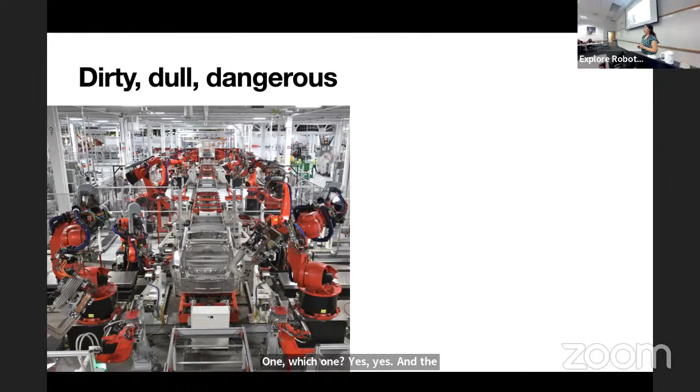That we can actually open it up and see what's happening inside.

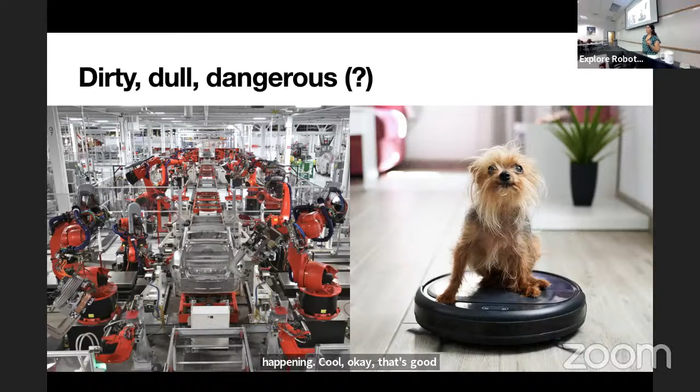Another example, I was watching a show on TV in a hotel room called The Toys That Made America or something like that, and they were showing Transformers. They're coming back, I think, or they already came back. I'm not familiar with what's going on at the moment, but I remember these toys - super metallic, bulky, technological, rigid. That kind of toy is what we were interested in playing with for a while, and this kind of toy has inspired us to do robotics.

What about now? Yes, now it's less about toys and more about science fiction and seeing what we're able to do now, and interested in what we can actually do in the future.

People might be inspired by the Roomba in their house, but it seems comparatively uninteresting. Roomba is less interesting than Transformers. What is more interesting than Transformers? Well, to a kid, yeah.

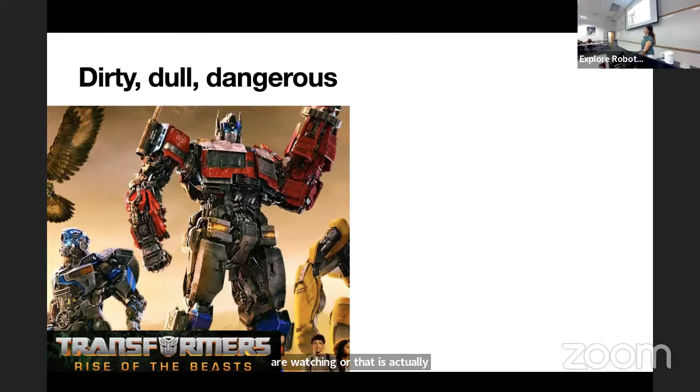Is it cute? Yeah. Do we like it? Yeah. Does a robot have to be cute for us to like it? No? Yes? Okay, nice answer.

So I'm opening this up with a question: what are we doing in robotics at the moment? Are we still interested in these? Or are we now shifting our interest?

Or with developing technologies - material science, controls, learning and everything - are we actually expanding our view of robotics and what a robot can be? Just food for thought, think about it. I'm very happy to talk about these kinds of questions.

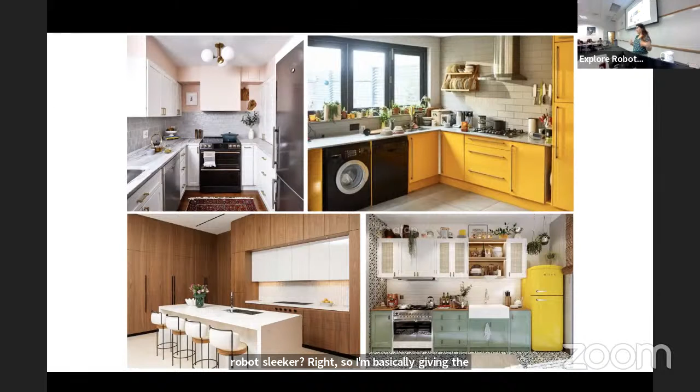Is it possible? That's the idea behind my research. So where do I look at how can I make it? To nature, obviously. We see a lot of examples that animals are compliant, so maybe we can do that. Like cats, I like cats, they can basically fit anything because they're like fluids, right? I look at different animals underwater.

Octopus is a great example. They can stiffen their limbs or relax their limbs, do a bunch of different motions, and they can fit in this glass, this bottle, and also cover a huge space. And ants are my favorites because they can jump, they can smash, they can use their mandibles as manipulators, but in very different environments. Put them on sand, put them on rigid surface, put them on a leaf, it's fine, they can just work it. So how do I make robots that can actually change their shape or adapt their shape to the environment, become bigger, smaller, or change their stiffness, or work on different surfaces? Is it possible?

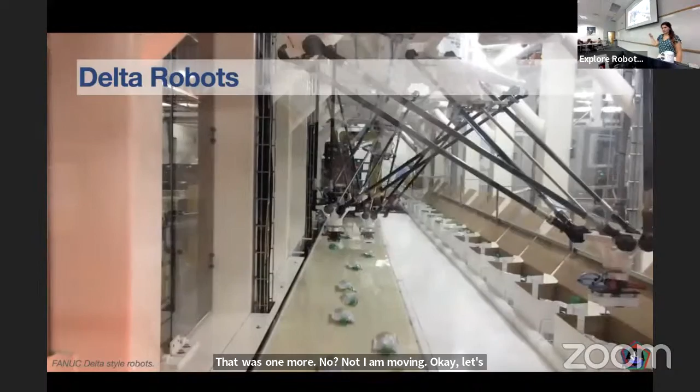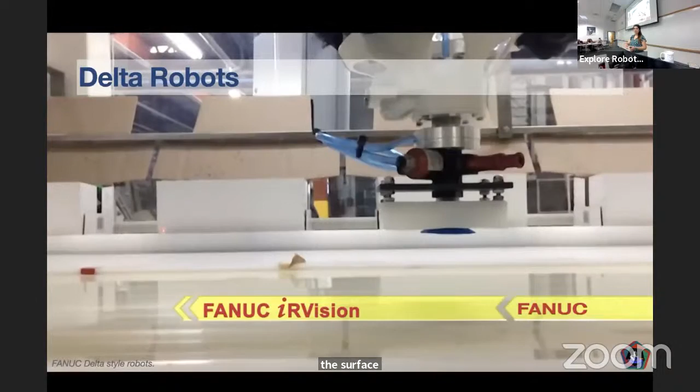Okay, let's start with combined manipulation. So these are Delta robots. Delta robots are widely used in industry. They have 3 actuators, meaning 3 degrees of freedom, but the actuators are connected to the end effector with parallelograms, which makes the end effector parallel at all times to the surface. So they can move in X, Y, and Z, but they cannot do any rotation. If you add one more degree of freedom at the very tip, they can have a 4th degree of freedom, but usually the mechanism is 3 degrees of freedom.

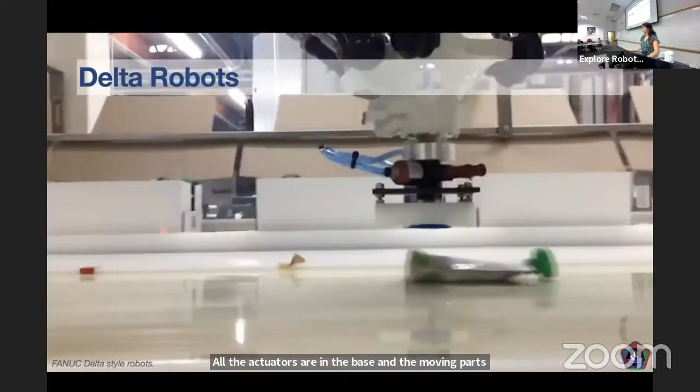They are widely used for pick and place applications where we don't want humans to touch things to be picked and placed, like medicine, food, food packing, medication packing. The good thing about them is that they are super fast, super precise, very accurate, because they don't have any mass in the moving parts. All the actuators are in the base, and the moving parts are just beams, like linkages with joints and links. It's a bit choppy, maybe because of Zoom, but you get the idea. So these are widely used, but they are usually large, rigid systems. If you look at nature, not everything is as rigid as this.

So my first inspiration is: if I can make it smaller, what would happen? If I can make it softer, what can happen?

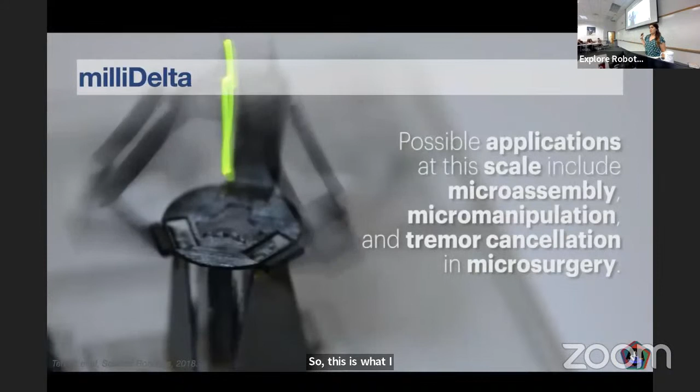This is what I did when I was a postdoc. This is a much smaller version of a Delta robot made using layer manufacturing techniques, not a 3D printer. You basically sandwich rigid and flexible materials to create linkages, and then you put it together, like pop-up cards.

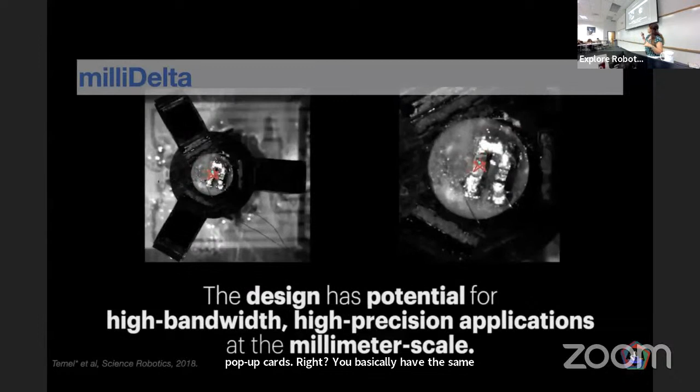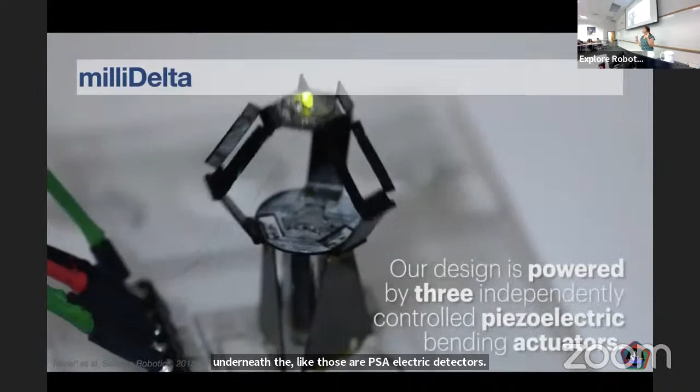We designed these robots. If you notice the triangles underneath, those are piezoelectric actuators. They can bend both ways. The good thing about piezoelectric actuators is they are extremely fast, so with that we reached super high speeds, which was very nice. And it's super small, penny sized. What can we do with it?

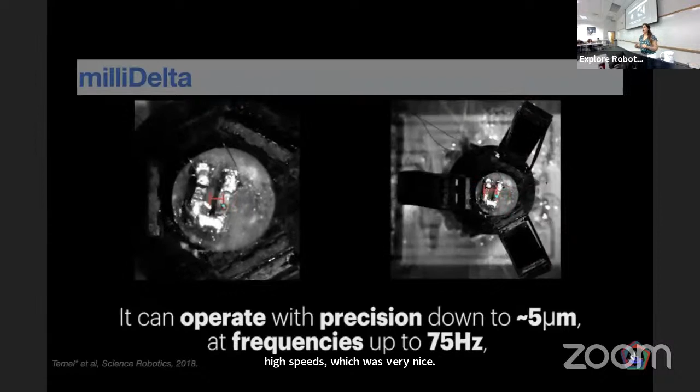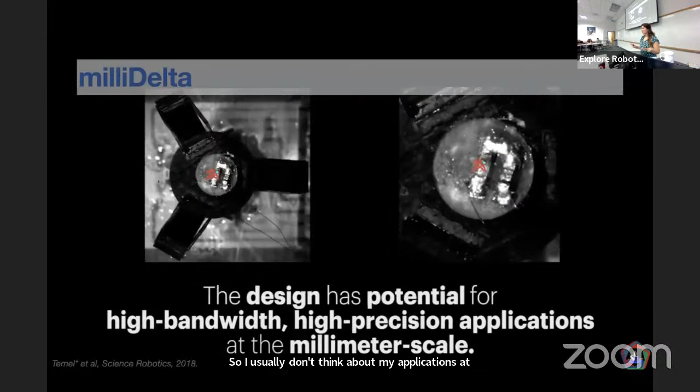So I usually don't think about applications at first. I like to play and then discover, and then I'm like, oh, now I have to find an application for this.

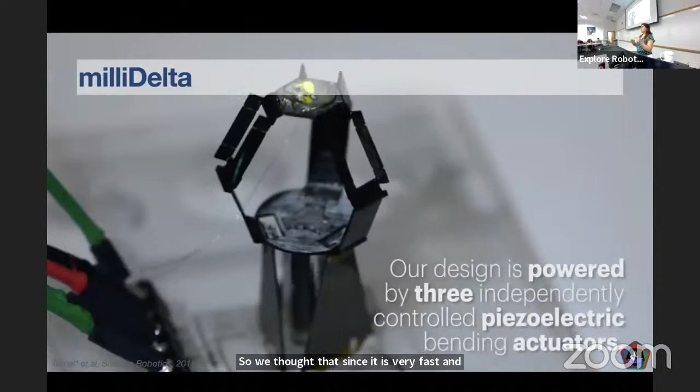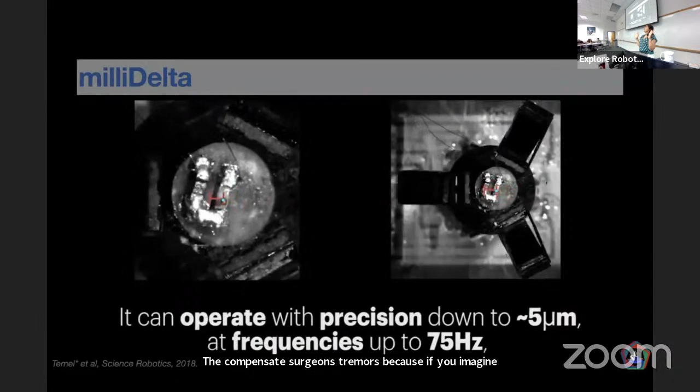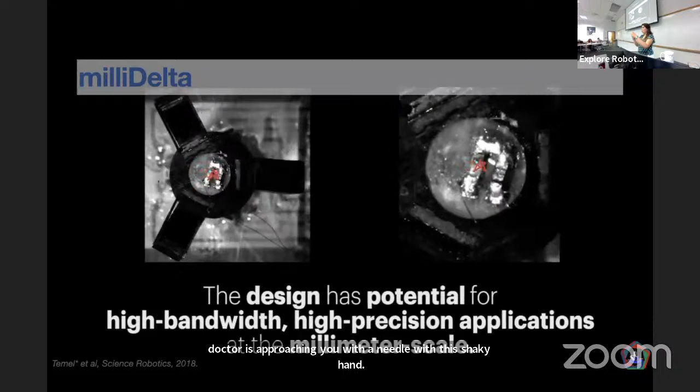We thought that since it is very fast and compact, it might be a great tool to put inside handheld surgical tools to compensate surgeons' tremors. Because if you imagine sitting in an eye doctor's chair, and the doctor approaches with a needle with a shaky hand, I think I would run. You don't really want the needle to shake, right? We showed that this actually compensates different people's hand tremors in a very good way.

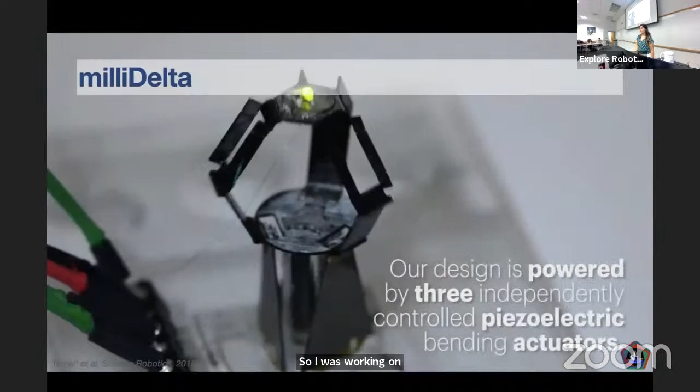I was working on this when I was a postdoc, and then I came here and presented this work, and my friends were very interested. They said, hey Zeynep, we want to make fingers using your Delta robots, because they are very fast, accurate, precise, and tiny.

So they can actually do tasks like we will pretend now. They can take a pill bottle from the bag of a sick person, open the bottle using many fingers, take one pill, and then feed it.

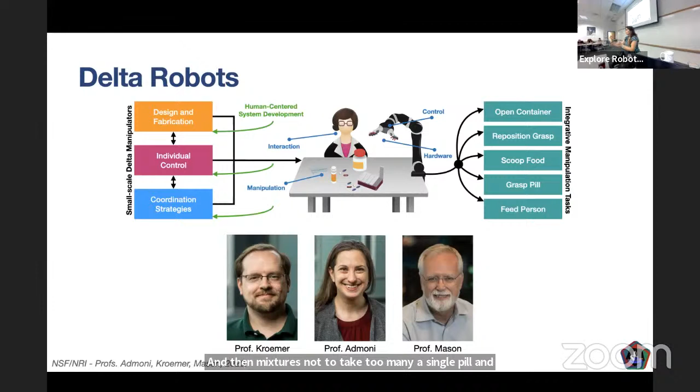So they said we want to make end effectors, manipulators, strong enough to open the pill bottles, dexterous enough to manipulate a single pill, and also safe enough to interact with humans. So how can we do that?

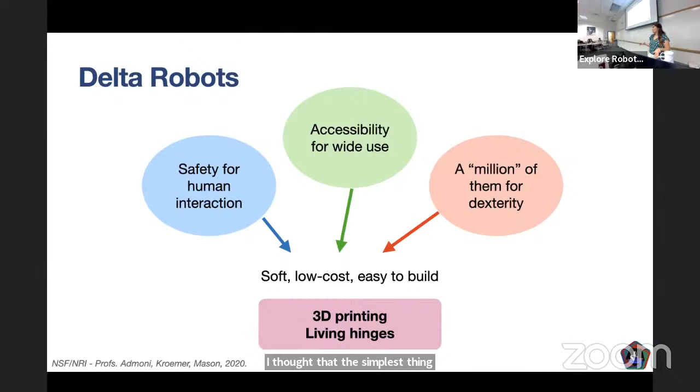This is one of the big projects in my lab. I'm skipping this since we already talked about it. I thought the simplest thing would be just 3D printing using soft materials we call TPU. Why not start there? And that's what we did.

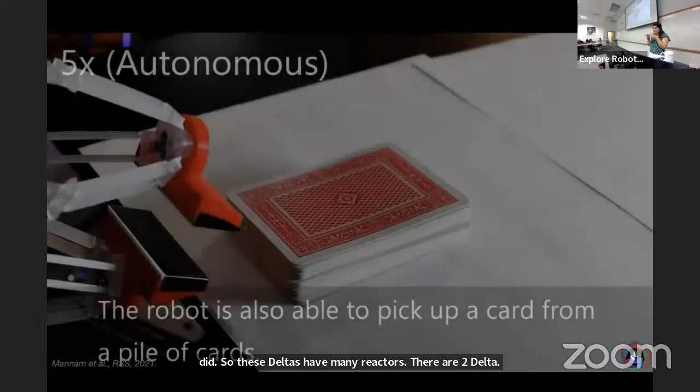So these deltas have linear actuators. There are two deltas, and they work like fingers. Think that you have two fingers, so they can actually do a lot of different manipulation tasks.

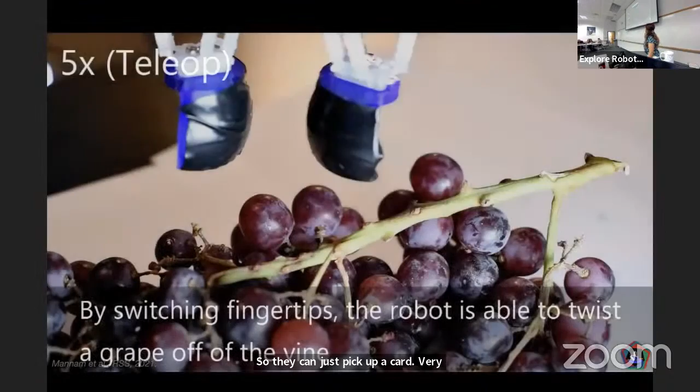They can pick up a card very sleekly. You can change the fingertips. They can grasp a grape and then rotate it to get it from the stem, so they are pretty strong in that way. And they can interact with soft objects too, like rolling dough.

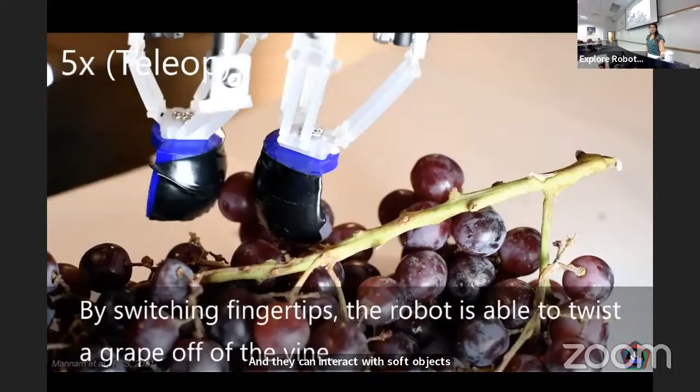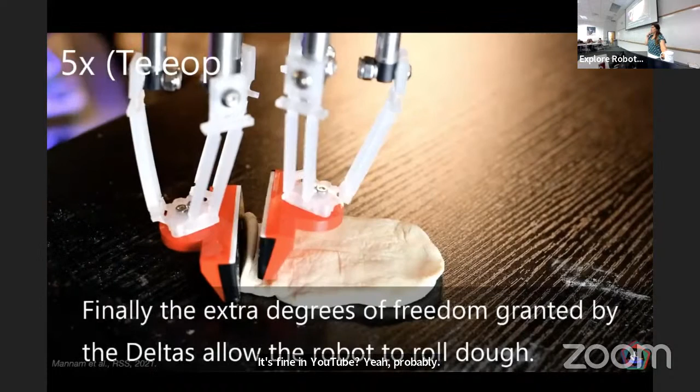It is very choppy, so the video is going very slow at the moment. Is it fine on YouTube? Yeah, probably. I think it's probably the projection. Okay, I'm glad it's fine on YouTube.

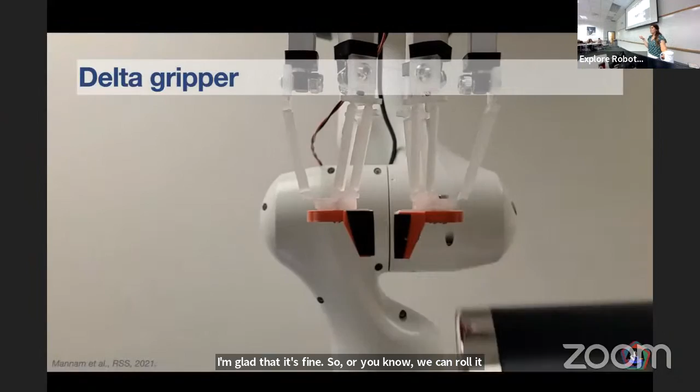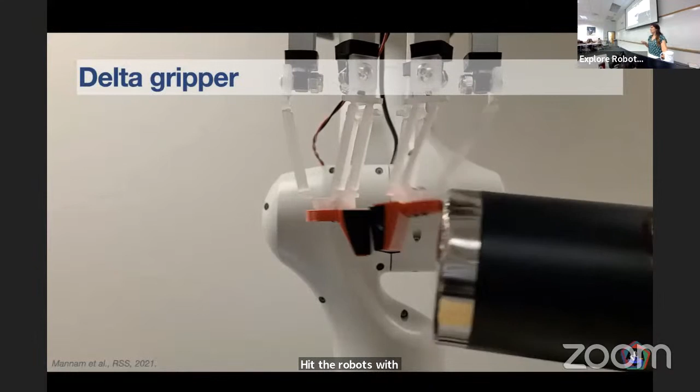So, we can roll it off. Okay, I'll move a little quicker. They're also very soft, so we obviously did the same thing everyone does: hit the robots with rigid objects, because that's a trend now. Nothing happens because they can come back, it's perfect.

What are the problems with this? This is a single delta module. What can be the problems with these?

Yes, since you need more force, the actuators take up more space. Sure, it's pretty compact actually. We wanted these to be longer, but we also have very small actuators. But I can see that.

What else? Yes, precision. Since it is soft, and we want it to be soft, we cannot really control it properly using kinematics. So what do we do?

We use learning, so that's where I collaborate with other people like Professor Oliver Kroemer to help me control these actuators, these manipulators precisely, or as much as possible. The other thing is that these soft materials change their behavior with time, with humidity, with temperature. A lot of things are changing in our environment.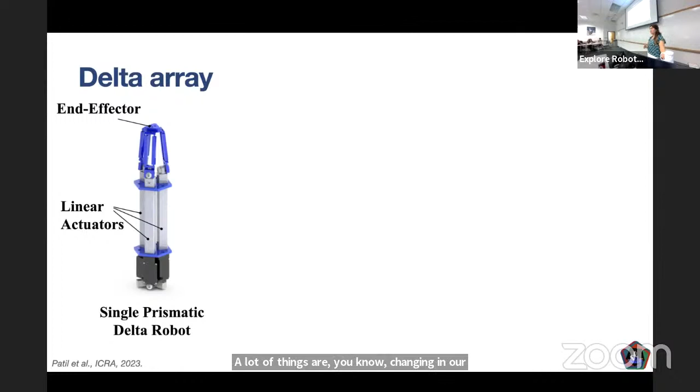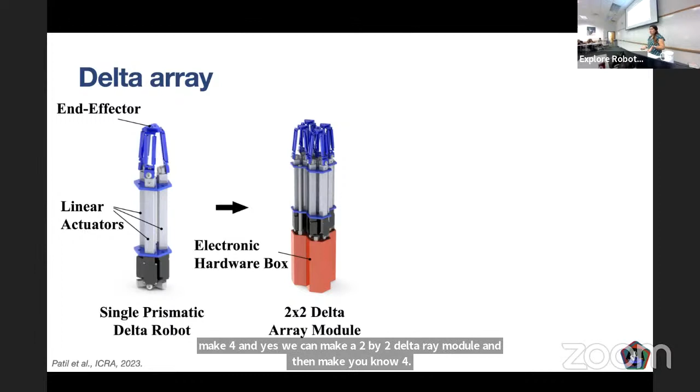Would they actually adapt to those changing parameters? So when we did that, we built one module and used it with two fingers. Cool, but we wanted something bigger, to study this multi-finger manipulation thing. So can we make 4? And yes, we can make a 2x2 delta array module. Why not go bigger? Let's go crazy. Can we actually make 64?

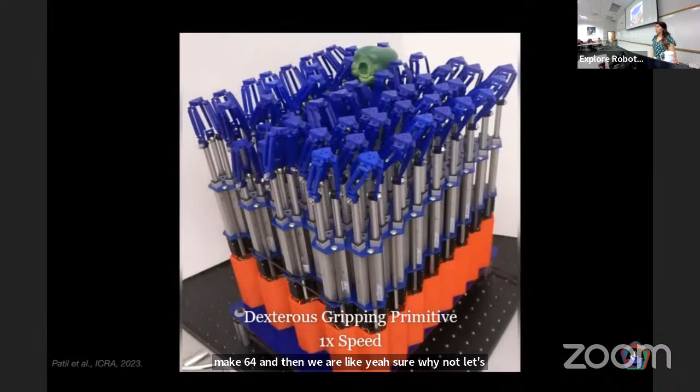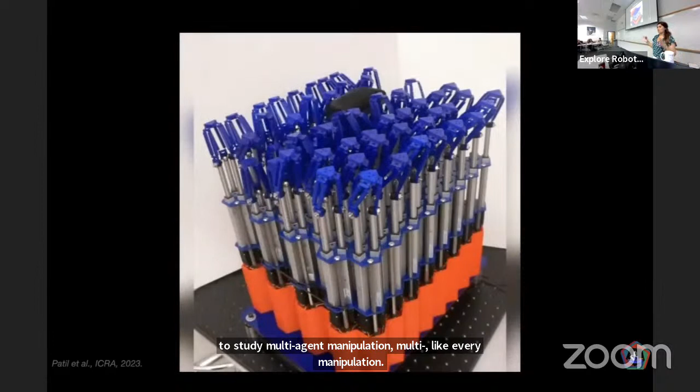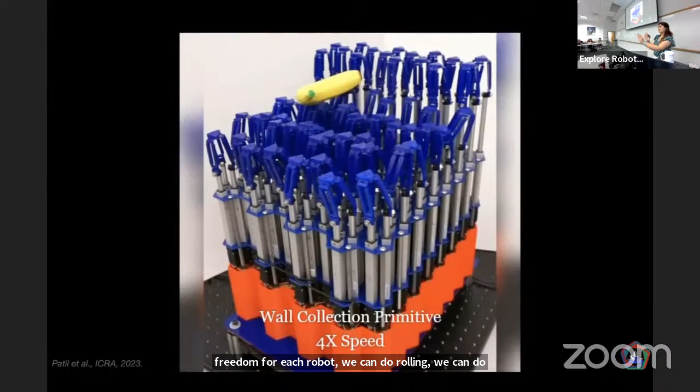And then we were like, yeah, sure, why not, let's make 64. So this is the delta array setup that is in my lab. That is pretty huge, but it's a great setup for us to study multi-agent manipulation, array manipulation. And we show that we can do a bunch of multiple tasks with these kinds of arrays. Since we have 3 degrees of freedom for each robot, we can do rolling, moving, pushing. We can also raise some of the robots to create a wall, to align things, right? So we were very excited about this.

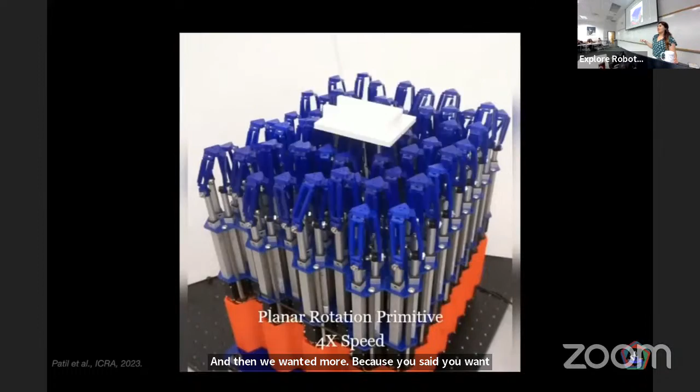And then we wanted more, because you said you want this to cook, right? I like pizza, so I said, can this actually work on preparing pizza dough? I'll just put the blob of dough and it will open it. For that, we need to turn it upside down, and that's what we did. Now we have a camera in the bottom, all the robots are upside down, and we are working on how to actually manipulate objects using this multiple array.

So this is a big multi-agent learning problem that we are working on. Stay tuned. If you know Sarvesh, do you know Sarvesh? If you don't know Sarvesh, go meet Sarvesh. He's a great guy, he's working on this project, and he would love to talk about it with you.

I was wondering how long it took to build the whole system, and also how much the total cost was.

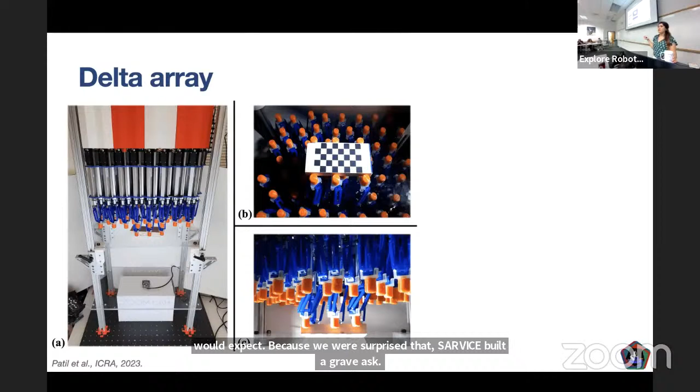I don't know the exact time. It took shorter than we would expect because we were surprised that Sarvesh built it very fast. We were like, oh, we have it already. The big thing was Sarvesh started during the pandemic, so deliveries got delayed, right? So that was a problem. As for the cost, I'll say $80 per actuator times 64, maybe 100, so $10,000 let's say, which is not cheap. We are aware of it, but this is a huge system, and this turned into a research project now, not for immediate future applications. So for a research project, $10,000 for this kind of array is not bad.

Sarvesh was on a panel for them 2 weeks ago, so they got to be in this room. Oh yeah? Okay, cool. Yes.

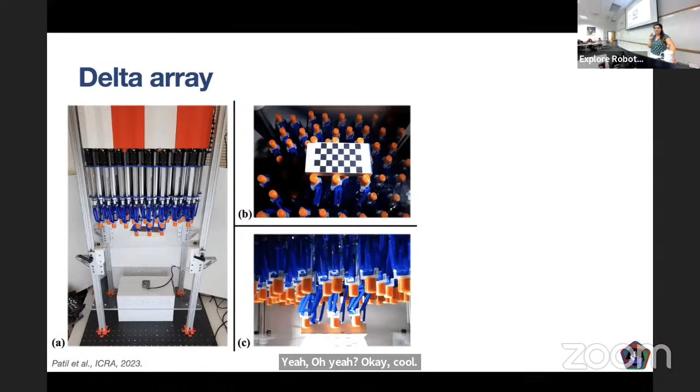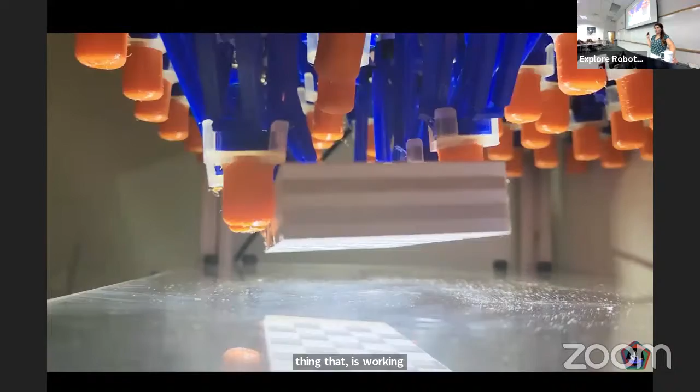So you met already Sarvesh. Yes, okay. So this is the recent thing Sarvesh is working on, like which robot should actually go down to manipulate this block and then push it forward. There are multiple other things, but we're not done with the project yet, so if you want, you can talk to him.

Another thing I'll quickly talk about is, since I like working on small things, I was like, hey, this Delta array is so cool, but I want something smaller. Can you build me something smaller? So this is Zilin's work. Zilin is not in the US, I think she'll be back soon, so I'll encourage you to talk to her too. She said, okay, why don't we build a hand using a Delta robot? And this is what we did.

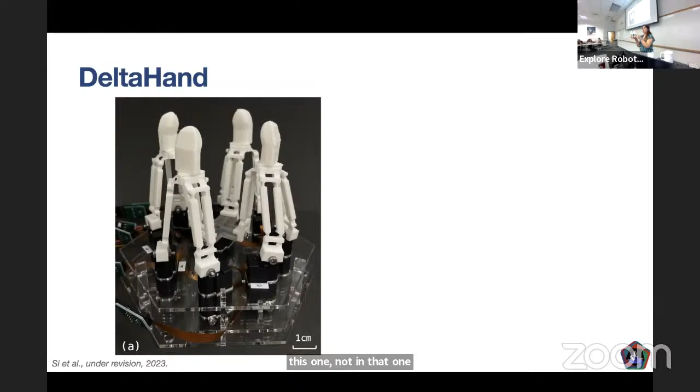This is 4 Delta robots. There are coupled actuators in this one, not in that one. I think that one has 12 actuators, this one has only 5 actuators. So we configured them in a way that we can couple the actuators, so it is lighter. And then we studied the motion to see if we can still get the same force or workspace from these manipulators. That's what we started studying, so that I can bring robots wherever I go.

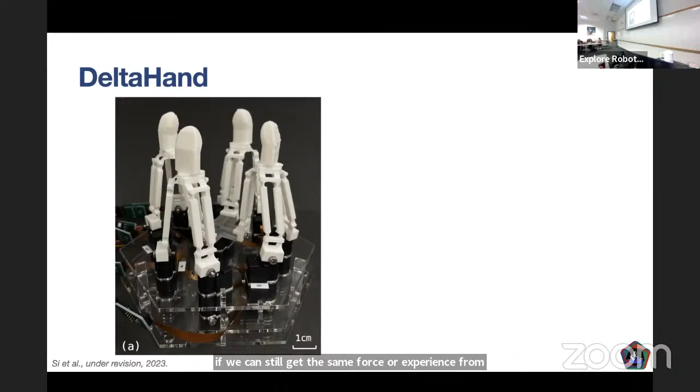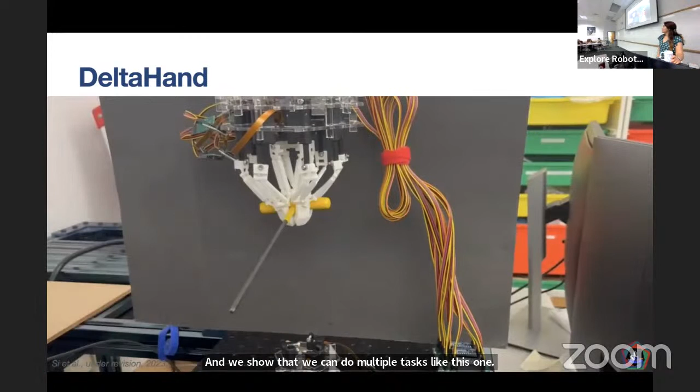And we show that we can do multiple tasks like this one. It's also pretty strong. You can see now Zilin is applying a good amount of force, but the robot is not giving way.

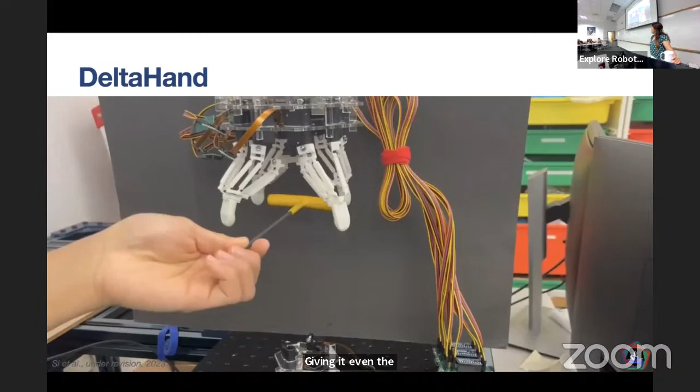Zilin built a teleoperation setup. There's a Leap camera watching Zilin's hand motions, and the robot is mimicking what Zilin is doing to open up a soft object, in this case a rope, and also opening a cap bottle.

Yes, 15 minutes. Yes, I've heard fingerprints are useful for humans for grabbing paper. How did you all approach that challenge?

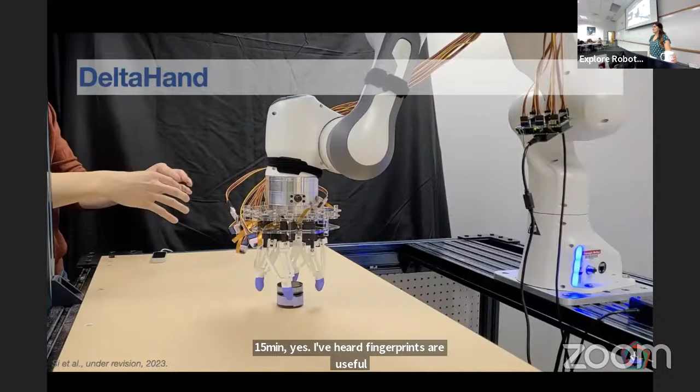Do you see they are different colors? We are actually trying a lot of different fingertips, like using softer materials or patterns, and we are now working on embedding sensors in the fingertips so we can have the full system as a robotic manipulator. It's definitely important. Also, cloth folding, we are working on it.

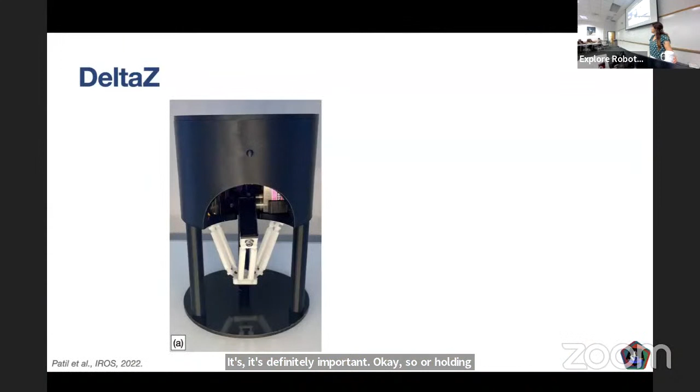I'll move fast because we are already at the 15-minute mark. The other thing we can do is, oh no, this is broken.

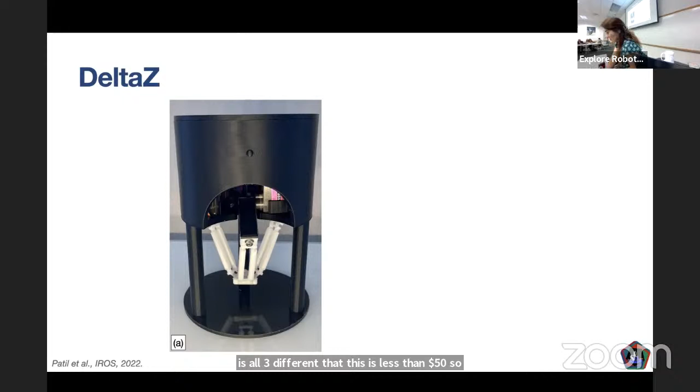We developed an educational tool using Delta robots. It is all 3D printed, less than $50, so students can learn how to use robots or anything robotics related. The end effector can be changed.

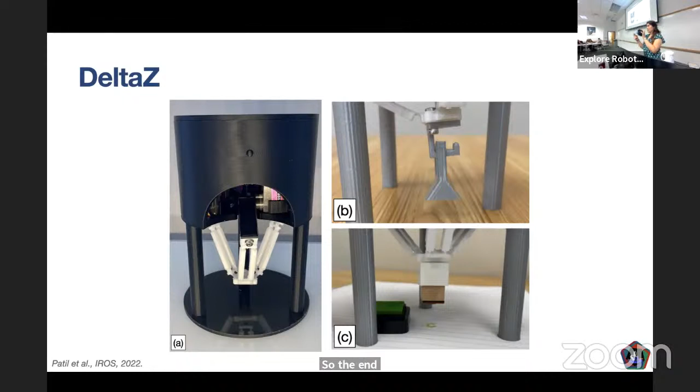This is an iPad thing that I was playing with. The parts are all on GitHub, so if you're curious, you can check.

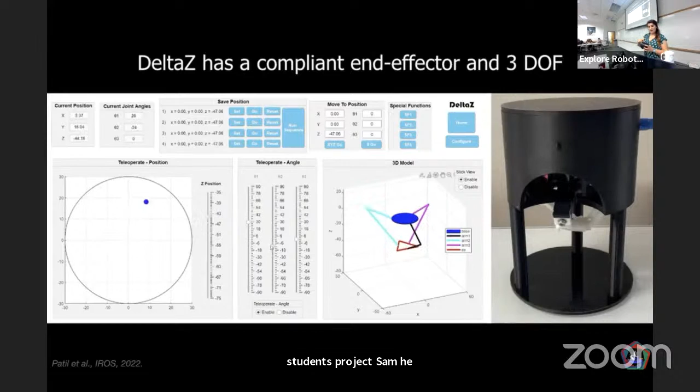This is actually a research student's project, Sam. He made the user interface, the design, the fabrication, all the files. You can find and play with it. Everything is commercially available, so you can build your own.

This is pretty broken, I'm very sorry about that. But I'll pass it around. Feel free to open the cap, see what's inside, and play with it.

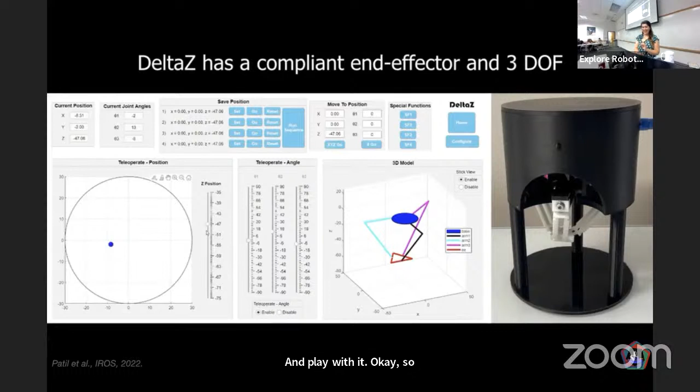I only got through one project and I have a lot more to talk about, but we are already at the 10 to 12-minute mark, so I'll stop there and see if you have any questions. I can keep showing videos.

It seems like you use a lot of creativity and play to come up with ideas. How do you actively incorporate that into your design process, or are you just really into it and it just happens?

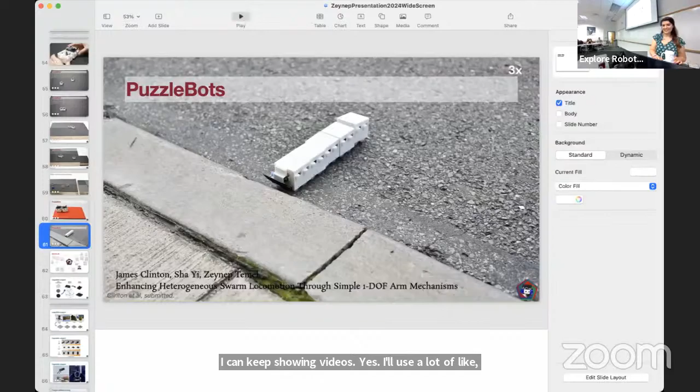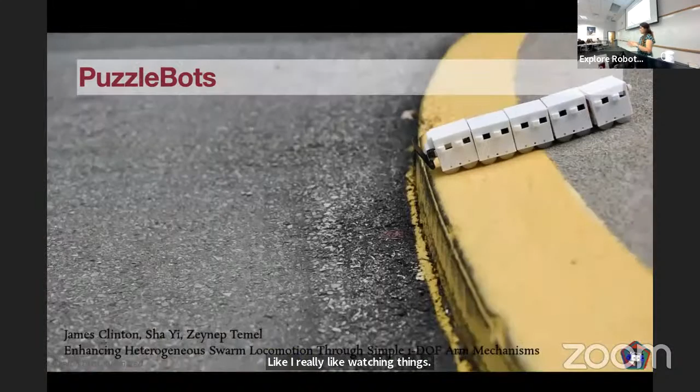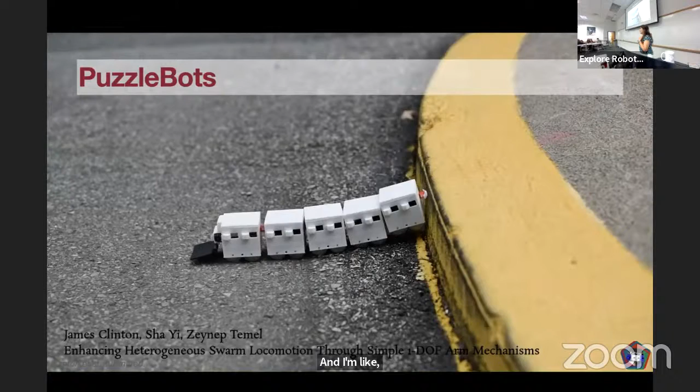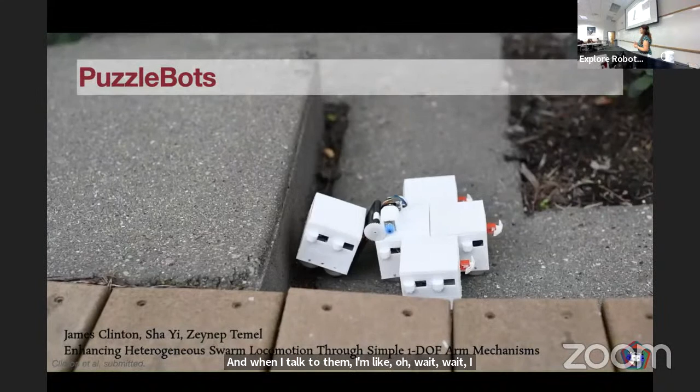Both. I really like watching things around and how things happen. Sometimes when I play with something, I just start designing, and then I realize I should have done it this way because it might work better, or why am I not doing this way? Sometimes I can't see it because I'm so into it, but other people can say, can you explain this to me? And when I talk to them, I realize I should do it this way. I really like the play component in design because it breaks the walls you put for yourself. You obviously need constraints or requirements, but if you limit yourself with respect to materials, actuators, or design just because things have been done a certain way for years, I think that limits creativity. I just want to go and play, and most of the time, really cool things happen when I play.

So these are PuzzleBots. I will give them for you to play with. They can attach to each other in two different ways. If they attach sideways, this is a rigid connection, so they become a block. If they attach front to back, this is a soft anchor, so they're flexible. This way we can adjust the stiffness of the configuration of these robots.

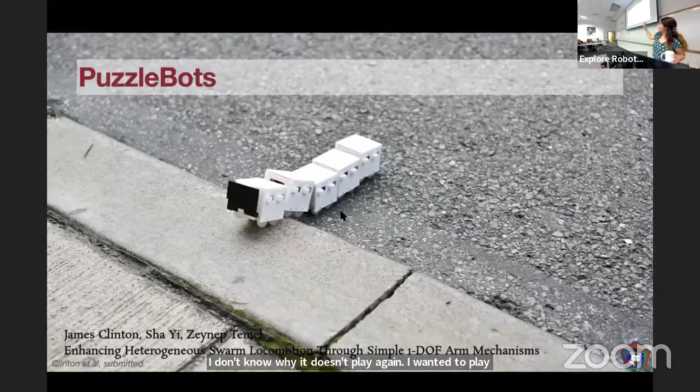I'm showing this because that climbing mechanism, though not the PuzzleBots, is a research student project by James Clinton. We submitted the work and are waiting for the results. All these mechanisms he designed are meant to overcome obstacles in different terrain.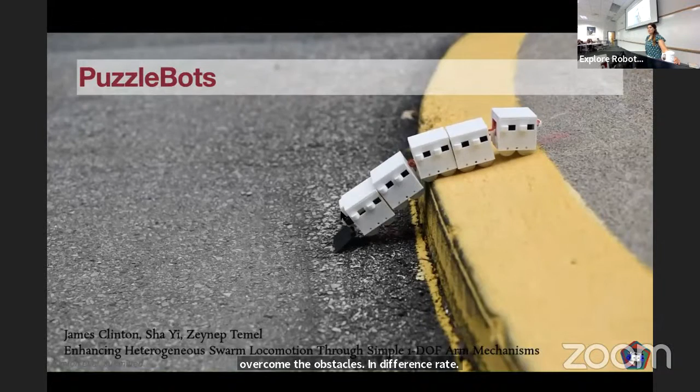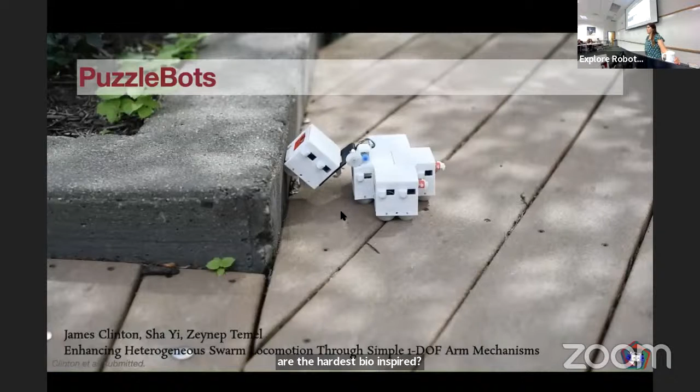Any other questions? Yes. What do you think are the hardest bio-inspired qualities to mimic? I imagine an ant jumping is a little different than an octopus collapsing in on itself.

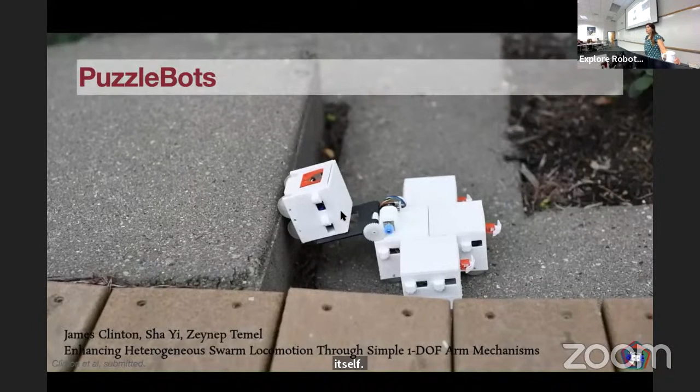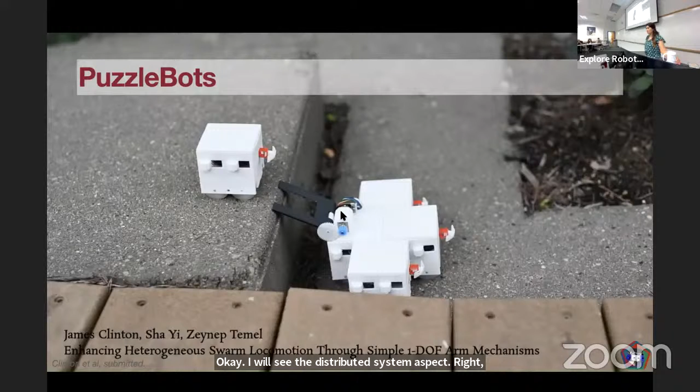Good question. I would say the distributed system aspect. We usually put a camera on a robot and expect it to do everything. But if you look at our cells, we are full of sensors - not only touch sensors, but temperature or humidity sensors as well. I think an octopus does that, but how? Or an ant does that, but how? Because it actually has very limited compute and very limited physical ability. But sometimes with all those sensors, they can make sense of all that data and then do the action. I would say that, but I'm not very confident.

Yes, so you seem to be using a lot of the products of evolution as inspiration. Have you ever thought about using evolution itself as an optimization paradigm to either design the robots or to design the control structures for the robots? Yes, I have a friend in computational biology. We will hopefully start working together to explore that. That's a great aspect.

So if you think of aircrafts, for example, they fly but they don't fly the same way as birds do. So I was just curious, can you give some other example that you think is interesting, where you have bio-inspiration but you change the design a bit to make it more efficient?

So that's not my work, but you should check Elliot Hawkes from, I think, UC Santa Barbara. I follow him, he does great work on jumping robots. We usually think jumping robots have to be small because they have to be lightweight to get to certain heights, especially if you're using traditional springs, meaning not combustion. We can also argue a spaceship is jumping - forget combustion, just springs, because that's what animals do. So his robots are relatively bigger, and I don't actually know any animal that big that can get to those extreme jumps, because he figured out a clever way of organizing springs in the body of the robot.

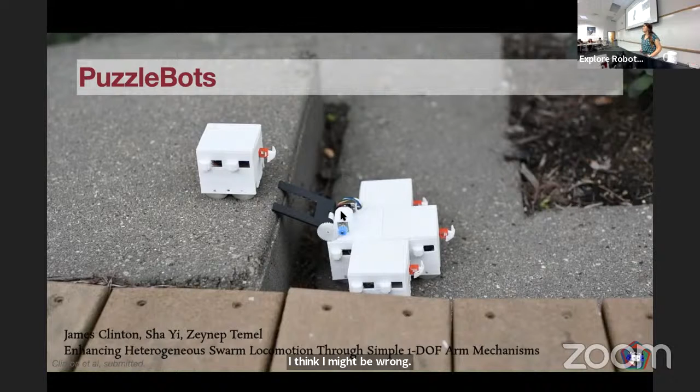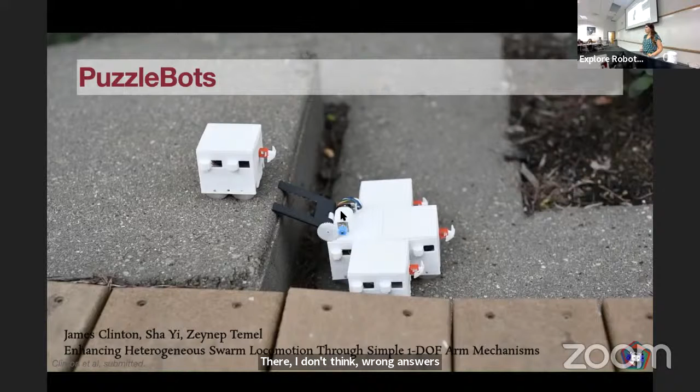How do you decide where to take a research project once you finish a portion of it? Like, for example, this project, where would the next steps be? For this one, what do you think? Just having it go into more challenging terrains and see what appendages would be useful there. Sure, yeah, that's obviously a natural path. I think I want to make it 3D. I don't know, whatever is interesting - I don't think there are wrong answers there, if you have a valid research question.

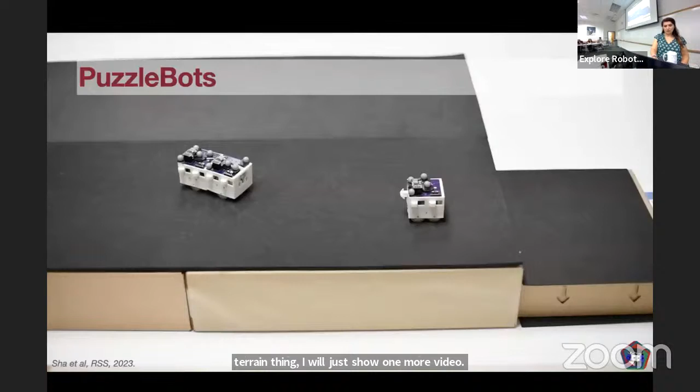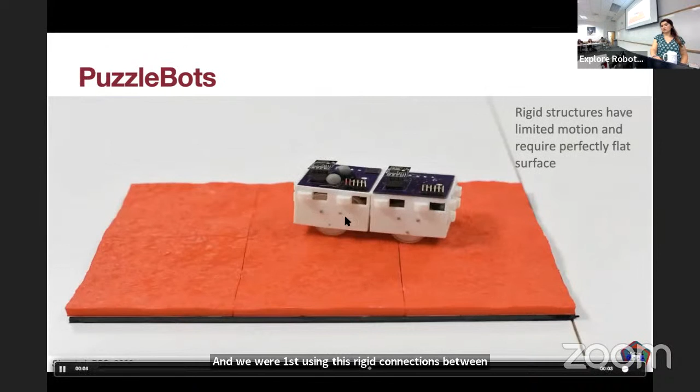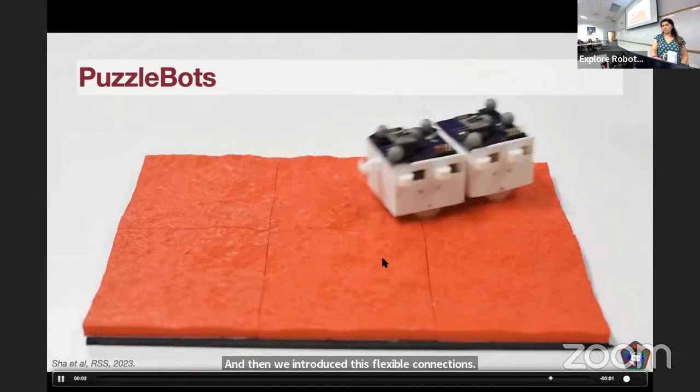So the terrain thing, I will just show one more video. This is a rough terrain, right? We were first using rigid connections between robots, and the robots got stuck because of these rigid connections - they didn't have flexibility and couldn't finish the course. Then we introduced flexible connections, and they were able to move across different terrains with different heights of obstacles. So yes, but this is still limited.

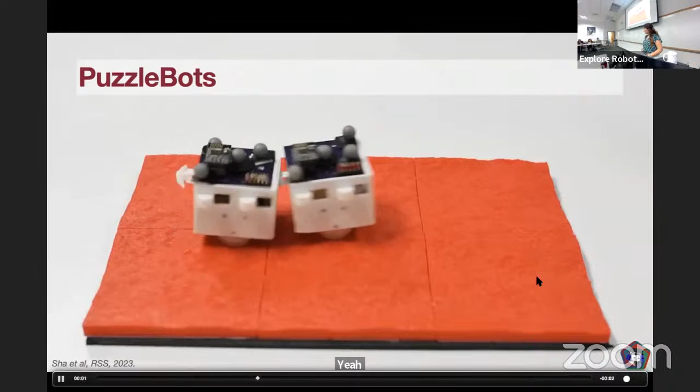Yes, I definitely see with the adaptation to different terrains, a lot of possibilities regarding rescue missions in order to build terrains.

That possibility you're currently considering would need to be a bigger size. Is that for recognition or stuff like that? I see two ways: either it could be done as recognition, to see the area, but also to lay ground for different equipment. It's so versatile, you can travel and have a lot of things that could help rescue missions.

This is a recent project I'm working on in collaboration with Laura Blumenschein from Purdue University and Nilsa Martinez here at CMU. I am more interested in small robots, and I think small robots can actually be more useful in search and rescue because they can get into small places, they're faster, they're quieter. There are many advantages. But they have a tiny little battery, they die in 30 minutes, so they're actually useless. But they're cheap, and we can make them mini, so they can be everywhere.

They're trade-offs, right? Laura is building soft-growing vine robots. The thing is, for all three of us, it's so annoying that we still don't have a functioning search and rescue robot that can actually do search and rescue missions. So we were talking about that, laying out the limitations of these robots. Soft robots are great, but they have limited turn capability, and they are very slow. So there are a bunch of things we don't like about them, they have limitations.